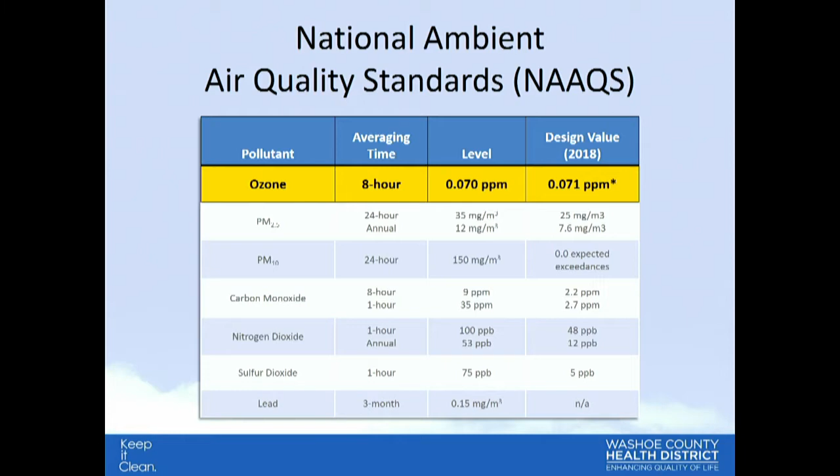So again, how did we get to where we are now? EPA strengthened the ozone standard in 1997, 2008, and 2015. We saw the economic recovery and growth since 2011, and that ties in with employment, population, VMT, and a result of that is higher ozone concentration.

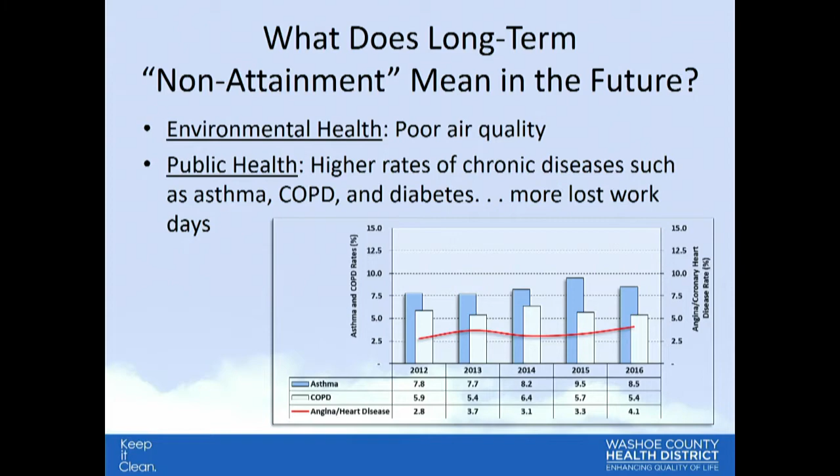So what does long-term non-attainment mean in the future? On the environmental health side, it means we have poor air quality. On the public health side, if that's what you're interested in, we're going to see higher rates of chronic diseases, asthma, COPD, diabetes, and also more lost work days.

On the economic health side, once we become designated as non-attainment, that really starts the clock for EPA as far as what we have to do. If we're designated non-attainment, there are increasingly more stringent requirements that EPA will apply to our area until we meet the air quality standard.

Making sure everybody's paying attention. For industry, it will require additional expensive air pollution control equipment. And if you look back at our inventory, the sources under our jurisdiction are about 5%, so it would put a very big burden on industry if we needed to get the reductions from that area.

The regional transportation plan will need a revision, which will include transportation conformity and a motor vehicle budget. Those are binding, and the regional transportation plan must conform to air quality plans, or FHWA will not approve the RTP. Emission offsets are a possibility, up to 1.5 to 1. So backing up a little bit, this doesn't put a halt on growth, it just makes it tougher for new and expanding businesses to come to our area.

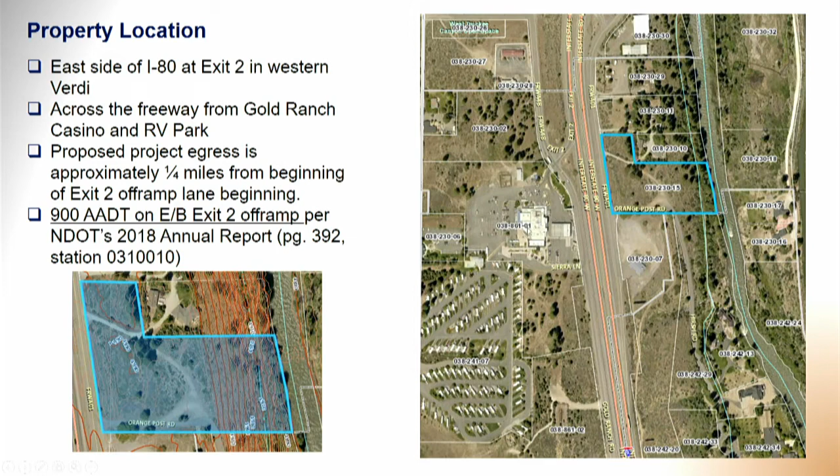Locationally, off of the off-ramp where the freeway lane splits, our access point and egress point is approximately a quarter mile from where that off-ramp lane starts. We are directly across the freeway from Gold Ranch and the RV park associated with Gold Ranch.

The property is in the city of Reno, brought in during the early to mid-2000s. It has City of Reno zoning as community commercial, and is master planned for suburban mixed use. Those two, the master plan and the zoning, are conformant with one another.

The special use permit request before you tonight is for a mini warehouse project in the CC zone, which is allowed with a special use permit, so that's primarily what we're seeking. We also have a request for an extension of hours, and we're happy to have dialogue if you have questions. This would allow people to go in and out of the facility, so if they're coming back late they could drop off their boat or RV after hours. Or we could have lockout times if you'd feel more comfortable with that.

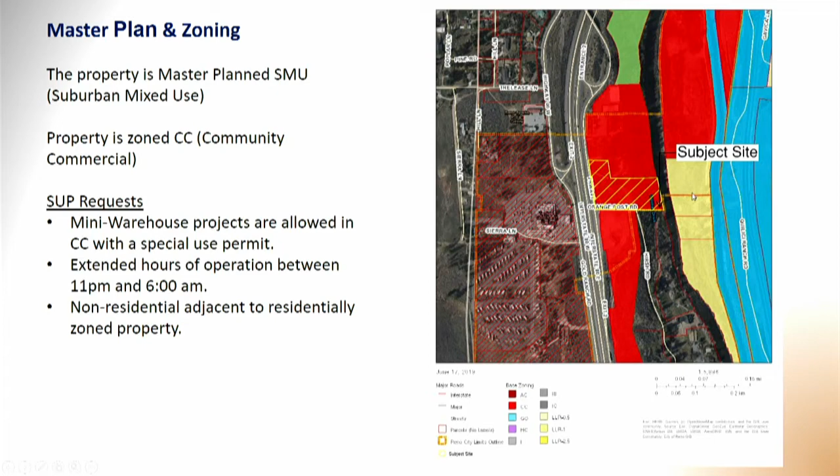We also have non-residential use adjacent to residentially zoned property. This property here is community commercial zoned, and this portion is county land—part low-density suburban, which is residential, and part general commercial. I'll show a county zoning map. So there's some commercial and some residential nearby. Across the river there's large lot residential, one dwelling unit per acre. That is really our nearest residential land, along with this parcel here—those are the two I'll be referring to when we discuss residential adjacency.

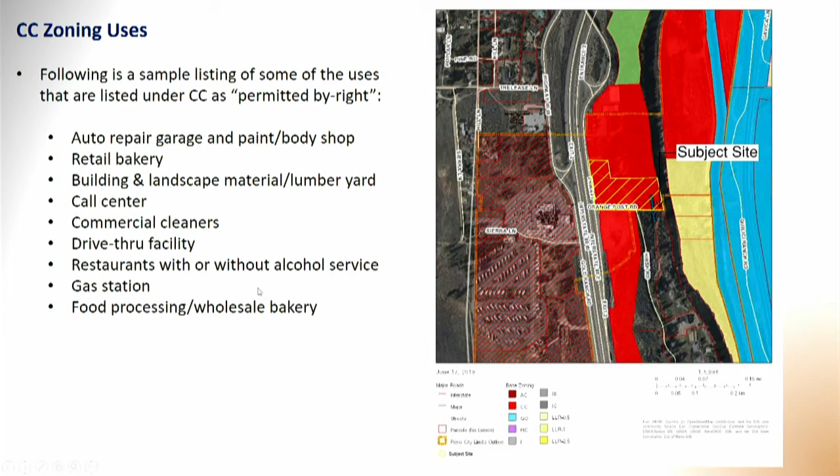The CC zone allows many different uses. One, with a special use permit, is mini warehouse, which includes boat and RV storage. I wanted to highlight some uses allowed by right under the use table. Given this location, there'd be residential adjacency issues with by-right CC uses such as auto repair and garages, retail bakery, commercial landscape material, lumberyard, call center, commercial cleaners, drive-through facilities, restaurants with or without alcohol service, gas stations, food processing, and wholesale bakery. I didn't list all of them, just a sample. All of these would present a higher impact relative to traffic and other site impacts. One thing I'll point out clearly tonight is that this is a very low impact development we're proposing.

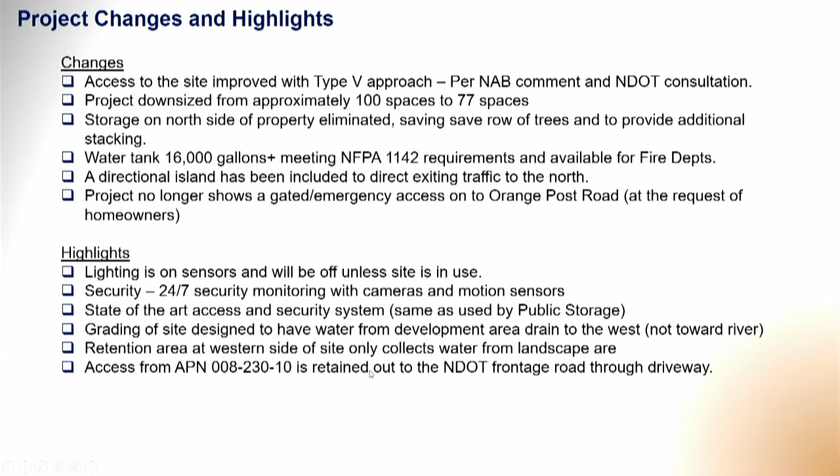Now let's get down to our site plan and show you where that is. There is an access that comes out, a driveway that comes out. We're retaining the right for access across that for the property owner to the east of us, which is right in here. I'll show you this site plan.

This is our old site plan, the one we originally submitted, which had 48 or 49,000 square feet of storage area. We did have development up here on the north. This access in here didn't have enough stacking, and there were concerns from NDOT, the city, and also from the neighbors. We also had an access down here that came out to Orange Post Road, which is a private access road, and a retention basin up here.

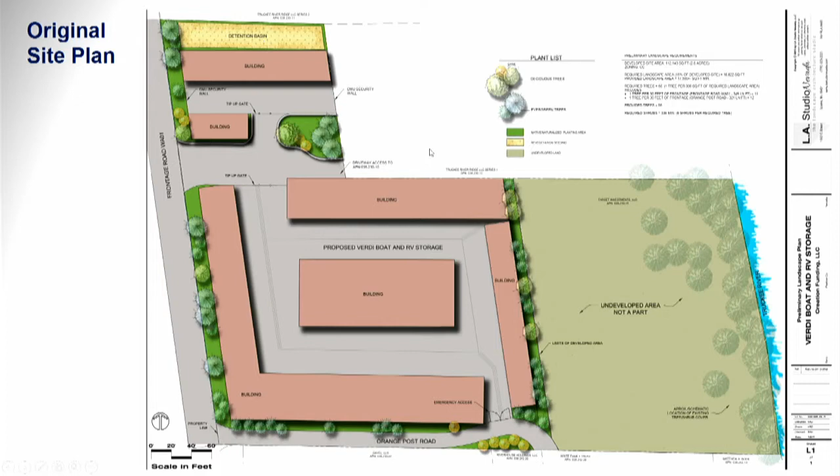Now let's go to our modified site plan. We have no development on the north area. What we have instead is the parking lot and stacking area, and more parking spaces because we've decreased the overall impervious surface area. We have a smaller retention area, located here, and there was some concern that it would flow down to the river.

Everything from this point on will grade back towards the west. The only thing this retention area will pick up is any water that might come out of this landscape area in a bigger storm, and it would collect here and then go into the ground. We have a valley gutter system with catch basins that will treat water for petrochemicals, including an oil water separator, as detailed in the City of Reno Orange Book standards. I have a copy of that if you'd like to look at it.

I can put that on the overhead. Mentioned 14 average daily trips, equivalent of about 1.5 houses.

We'll have no wash bays, dump stations, waste retail sales, repair or service on the site. This will basically be an access where you can park your vehicle, your boat or RV, and move on your way.

Trees that'll be retained on the site. This is a grove here of evergreens that before we had coming out. Tree here, we actually picked up a setback area with the redesign, and tree here, and then the trees down along Orange Post Road weren't anticipated to be saved. There was going to be some relocation of that road before, and now we're going to leave that road as it is.

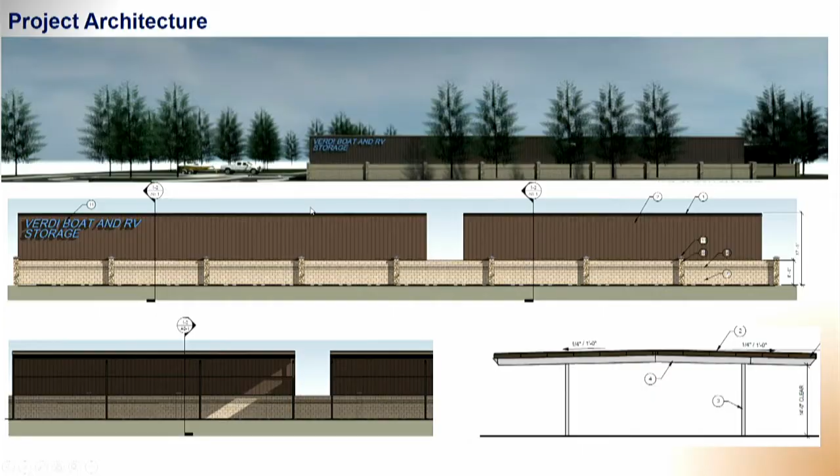I won't go through this, I'll just finish up. We feel that we have a very low impact site because of the way it's been designed, the number of units, the low traffic. We're in agreement with the staff and the recommendation. We do believe that all of the findings can be made.

I have each one of the findings. If you have any that you're having a question on, I'd be happy to go through those. With that, I'll close my presentation, be available for any questions. Okay, thank you, Dave. We'll call you up with questions after we hear from staff.

Brooke, good evening. Good evening, Planning Commission. Brooke Oswald, Associate Planner for the record. Michelle, can I have the overhead up very quickly?

So in submittal of the staff report, there was an omittance of a condition, that's condition 11. It is referenced within the staff report itself. That condition deals with signage. Specifically,

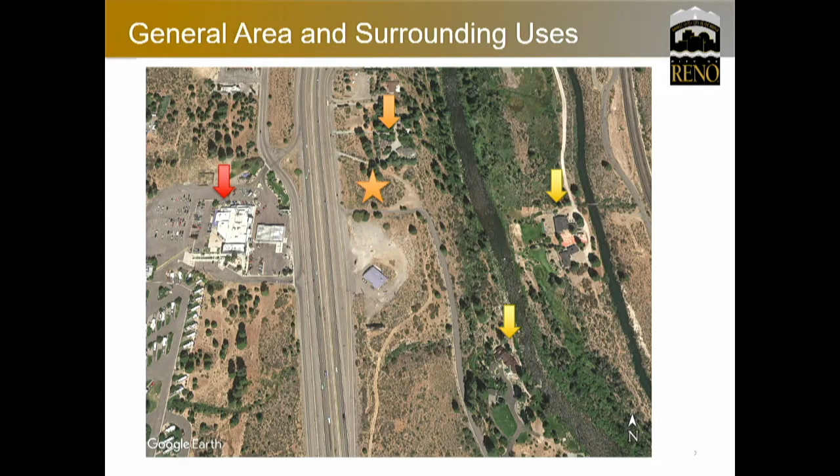For the special use permit, mini warehouse community commercial zoning, we're looking at the appropriateness of that use with surrounding uses. It is allowed within that zone with the SUP for extended hours of operation. We're looking at impacts associated with that project, and it has relatively low impacts. With extended hours and 14 vehicle trips per day, we would not anticipate large levels of noise or glare. Additionally, the site is walled, and the ambient noise of I-80 would overcome any noise anticipated from those extended hours.

The commercial development adjacent to residentially zoned property is significantly geographically distanced from the project itself. Looking at RV and boat storage in the proposed project, this has lower overall impacts than other allowed uses, as was demonstrated. There are similar uses in close proximity, and this is a normal use we would anticipate off our highway exits and other car-oriented areas.

The allowed height in our community commercial zoning is 65 feet. They are proposing 18 feet, that's a 6-foot wall plus approximately 12 feet above that, so much lower than the allowed height. The average trips per day is 14.

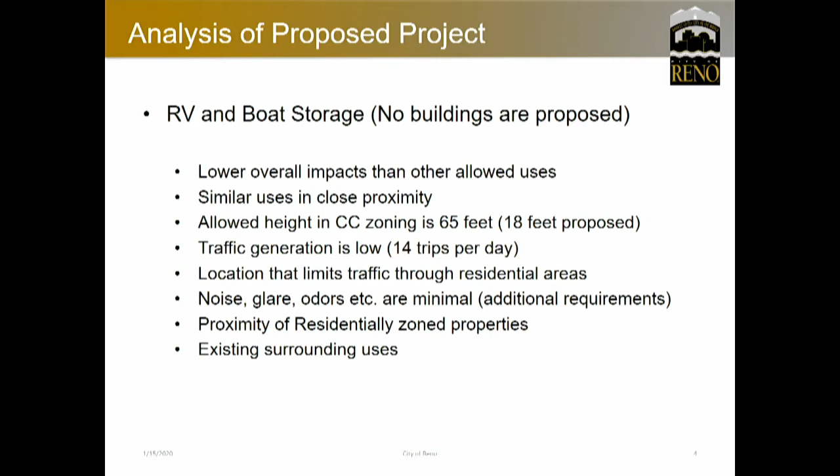That proximity to residentially zoned properties is far enough away that we're not anticipating any impact from glare or noise. The main impact is that residential unit lying directly behind the project, but we have a 6-foot CMU wall in the area that will limit any light glare. There are also maintained existing trees and an existing solid fence that will limit light glare into that property. Access to any adjacent properties has been maintained, both to the property directly east and adjacent to the site, and down Hirsch Road or Orange Post Road.

As was mentioned, limited utilities in close proximity to the project really modified this project and proposal drastically. As we move through fire, not having water service and not having sewer, this does become an appropriate use for the utilities that are provided there. With the modification of removing the buildings, the fire code can come back under 1142 and be used. Trey Palmer is here to answer more questions on that.

The access to NDOT is on that roadway exit 2. All permits, design criteria, everything will be handled with NDOT on there. They have looked at the project, made suggestions, and the applicant has worked with them to verify they're meeting their standards. They will have to get their permits through NDOT before they'll be permitted to move forward.

Those low traffic volumes coming off of there, I spoke with NDOT. We're seeing about 800 vehicle trips a day coming off that exit. They said it was relatively low, and they had very little concern about the traffic that this was going to generate. The applicant has moved forward, and will make any signage or corrections needed to accommodate their project.

Those easements associated with the project, as I mentioned, the easement is maintained down Orange Post Road. The access has been maintained to the property that is adjacent to that property. It should be noted that the owner who owns the property to the north of that project site - there is also access to that property behind through that neighboring property.

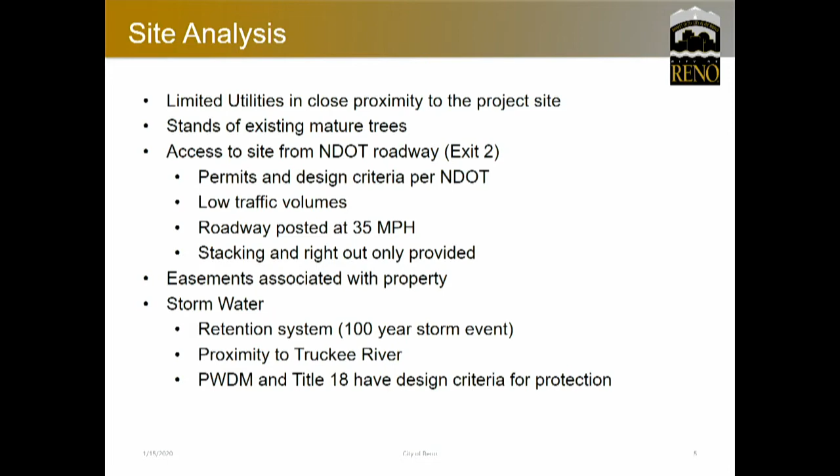The project has been redesigned, and with that redesign, it does meet the 1142 standards. They are a rural development standard. There will be a water tank and pump provided on site. That water tank and pump will be used to fight fires there, but will also be able to be used by Reno Fire Department in case of other emergencies in the area.

The proposed site meets all the access and circulation required by the Reno Fire Department. The storage area is contained with a non-combustible material, which means fire is, in theory, contained with a non-combustible CMU wall, and so fighting that and its spread becomes limited in that way. The emergency access has been provided to that secured area through one of the conditions.

There will be no management on this site - it will be 100% remotely controlled. Access will be through either cell phones or other mechanisms, and the site will have cameras that will be monitored 24 hours a day. Fire and police have reviewed that and feel comfortable with that security system and that ability to access or monitor the site.

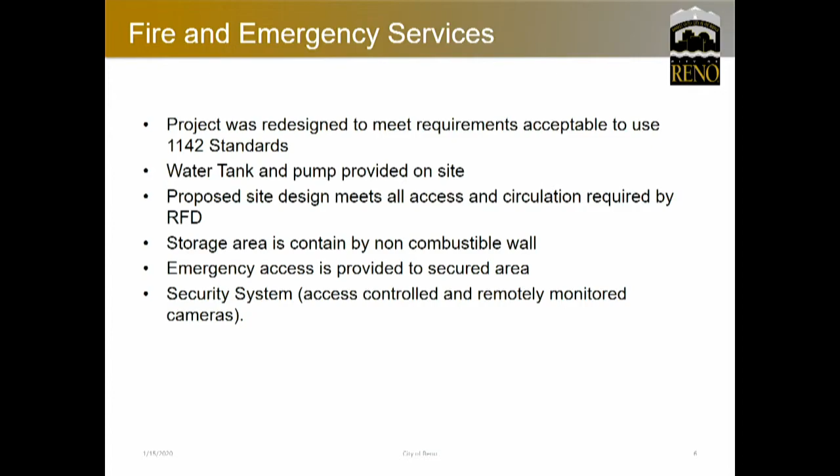So with that, with the application and the materials presented by the applicant, and the conditions as applied through the staff report, staff can make all applicable findings and recommends approval of the project. Myself, Mike Michelle, Planning Manager, Trey Palmer are all here for questions as needed.

Thank you. Thank you, Brooke.

Before we get to questions, I'm going to open it up for public comment. And before I do that, I'm going to ask for disclosures from the commission. I'm going to start with Commissioner Olivas. Commissioner Olivas, I visited the site and received email.

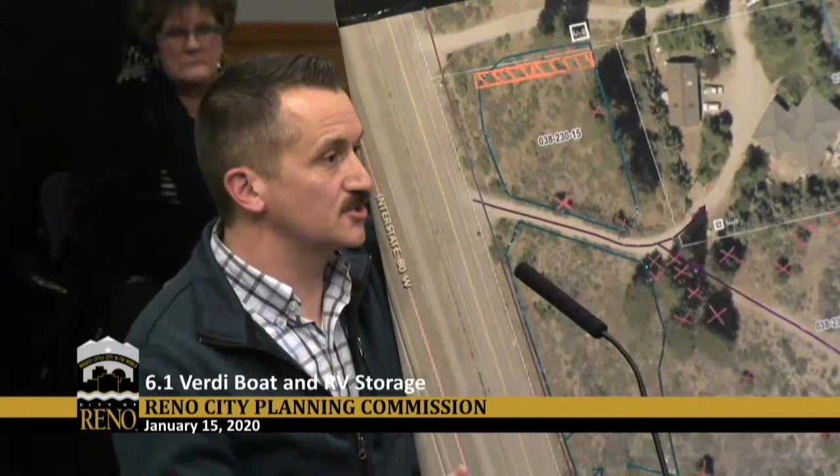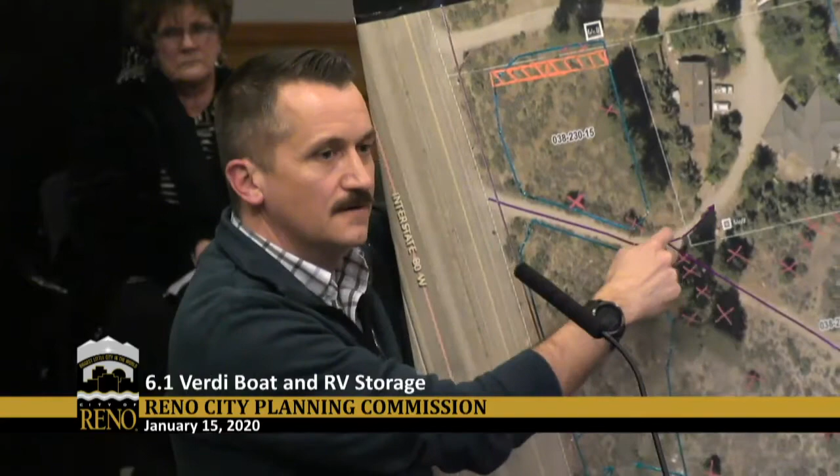Now imagine Memorial Day, Labor Day, July 4th. Any weekend during our Washoe County School District shortened summer, people are going to be out there getting their boats and everything. Imagine Memorial Day when everybody's trying to get their RVs and boats, and you live in this house, and you have to turn into the RV thing, then turn here, and then turn here.

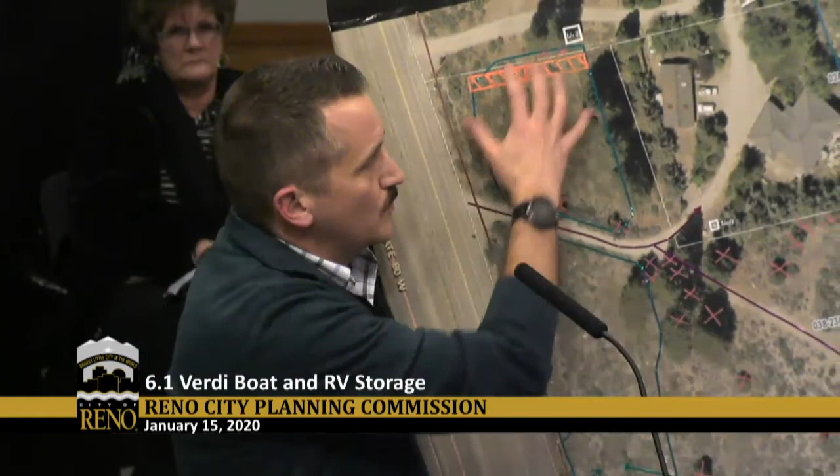What are you going to do on that Friday night when everybody's trying to get out of town? Yes, we have another road that they can access, but like my wife said, we may not always own that property. That may not always be the case, and the developer can't assume how we're going to use our own property. So that 14 average daily trips is going to be less than that in the winter months, I would be safe to say.

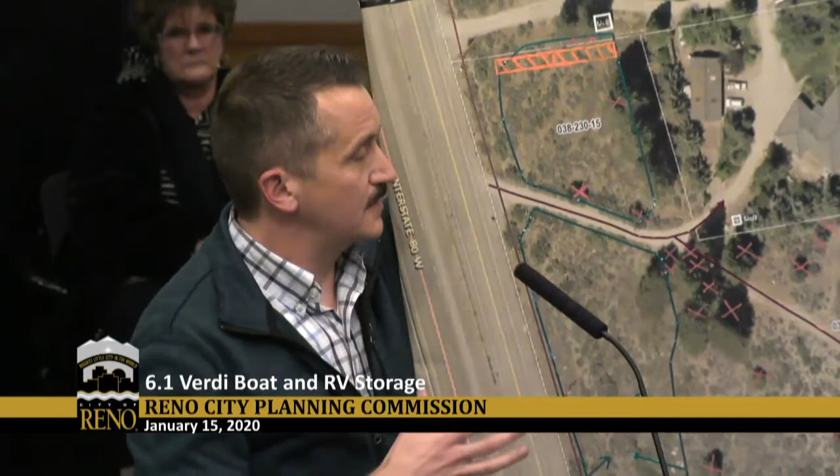But in the summer months, especially in those peak weekends, it's going to go through the roof. And that's going to just compound all those safety concerns that everybody's brought out. For those that have visited the site, if you see traffic coming off there, you know people speed. Everybody speeds. We know it's marked 35, but nobody cares.

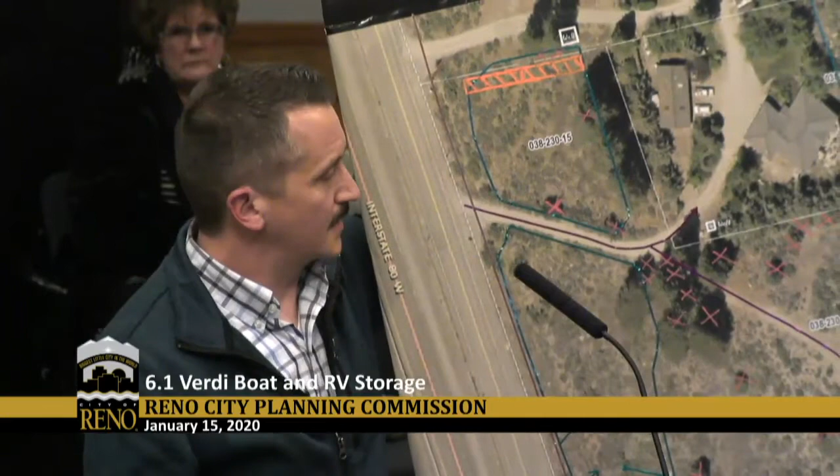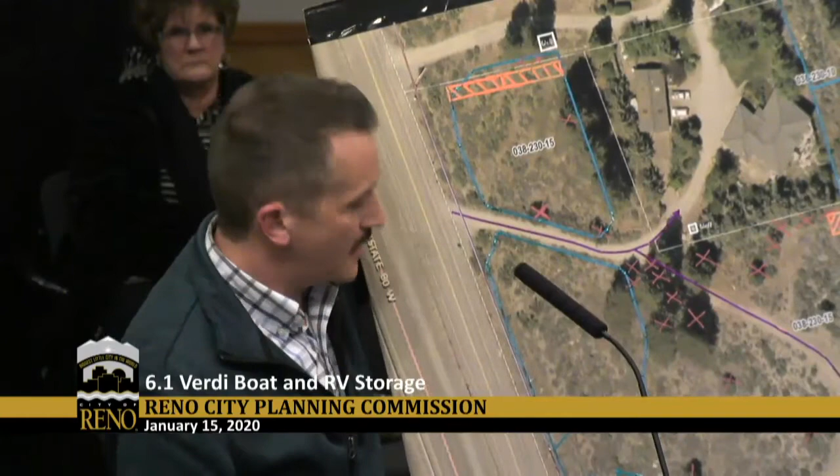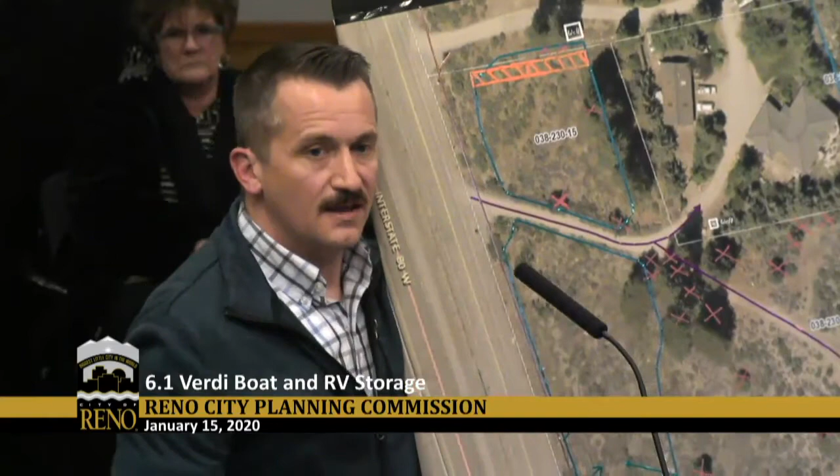If you can imagine somebody having to make a left-hand turn into this property, towing an RV or a boat, and they don't judge the speed that somebody's coming off that highway properly, it's going to be catastrophic. Same when they're exiting—you've got a big trailer and they're trying to come out. If they don't gauge the speed of that traffic coming off of 80, there's going to be a catastrophic accident there.

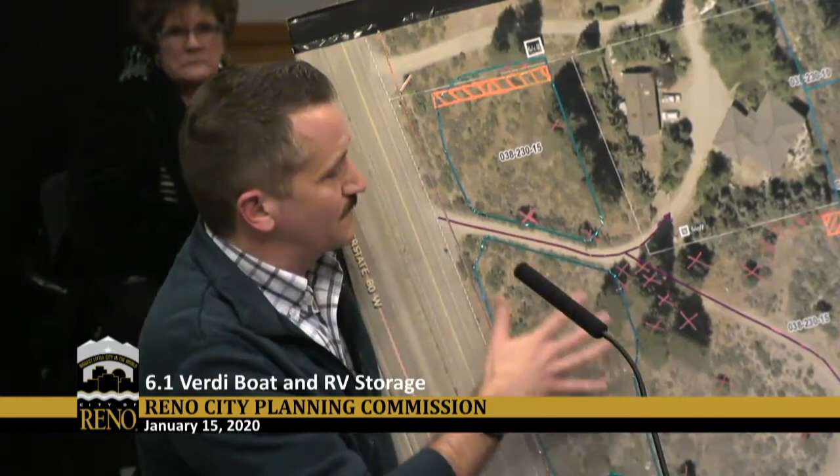And the project doesn't fit. I understand this is community commercial. I understand with the special use permits it is allowed, but right here, this is basically where the gate access is going to be to that property.

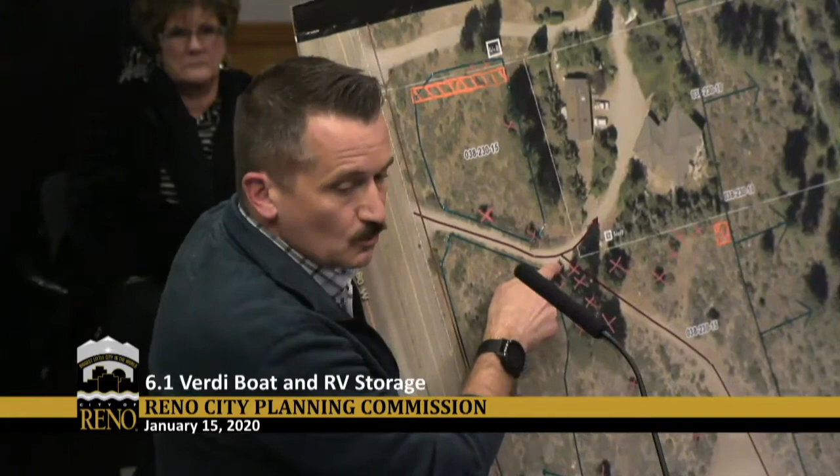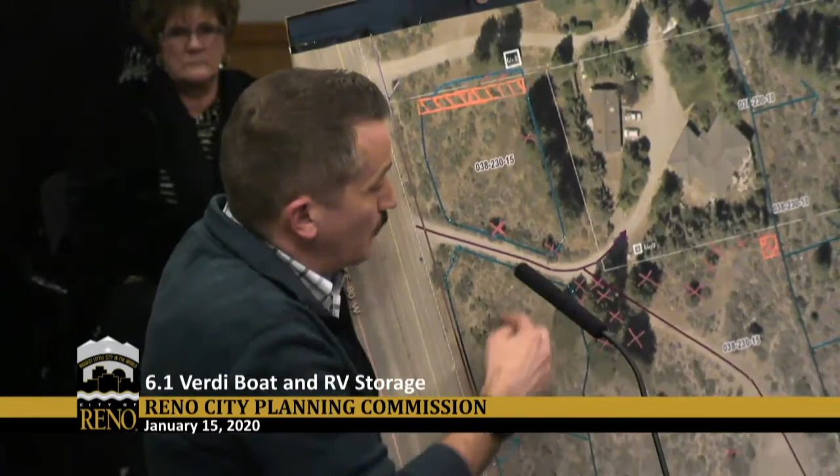There's no bathrooms. What are people going to do if they have to go to the bathroom? That good crop of trees that he said he's going to save, it's down in a little depression. Guess what? People are going to go down there to use the bathroom because there's no bathroom facilities on site here. So there's a lot of concerns that we have with this. It's not appropriate for this spot. Thank you for your time.

Apparently, we need to increase the size of our monitor to be able to do that.

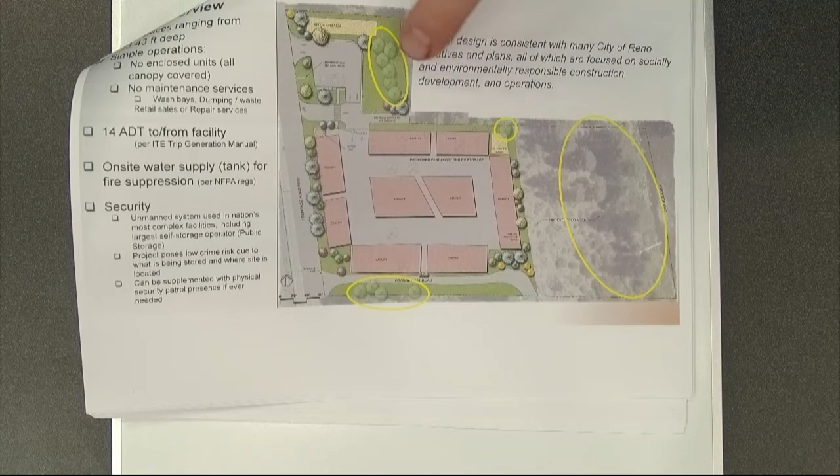Their well is right here. If that needs to be farther away... I had something on my phone I was looking at, but it was distance requirements from septic and leach fields to wells and property lines, not from a well to something that basically infiltrates water, which is what we're going toward. If there's a requirement for that, we've got additional area we can work with to pull that away and reconfigure it. We definitely want to keep the trees there.

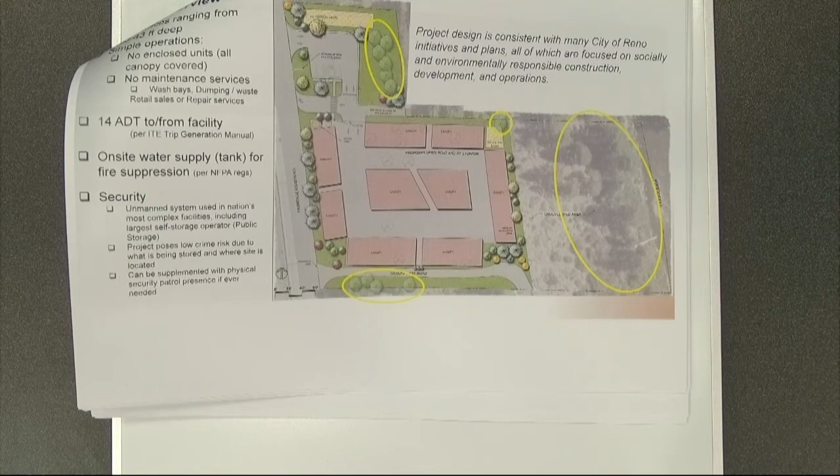I think Brooke alluded to it - part of it is that when you go into final design, everything doesn't remain exactly like this, but we have to be in substantial conformance. If there's a concern from the Washoe County Health Department about a retention basin being too close to a well, and I don't believe there is, we can find another place - it's already in the low part of this site where everyone's pointed out the trough is, that we can work with.

Last week we looked at a project and I asked about percolation. If you've got this designed to where it's going to go out, how are you so sure it's going to perk there? A lot of areas of town don't perk very well - we've got some bad soils. Being up in the Sierra range, you're going to have a lot of decomposed granite and different types of soil that help water perk in faster.

If we find a horrible percolation rate, you can still grant approval to the project, and if there's a condition of approval we can't end up meeting, the project doesn't go forward - it doesn't get built, or there has to be some engineered solution, or it might need to come back. You try to go through these things with a reasonable level of information without breaking the bank. You don't want to spend $250,000 for a solid maybe - that's not in anyone's interest on the development end. We look at housing costs going up and up, and the more you have to put in early with just a strong maybe, it's a challenge. So we try to do these things with the best available information.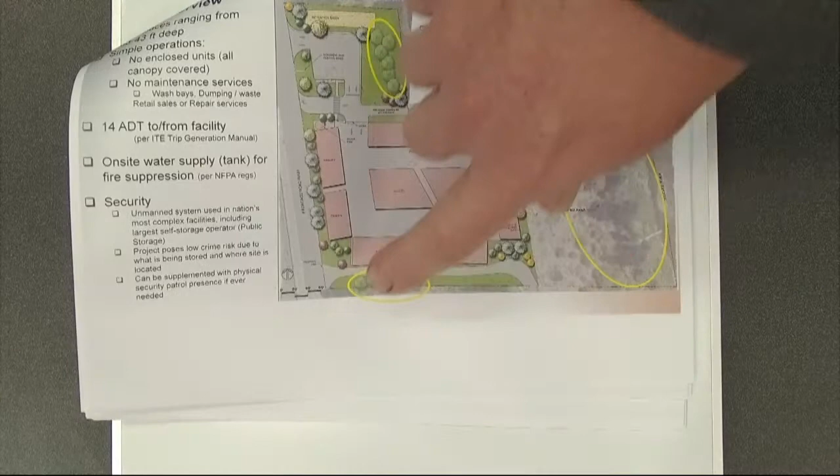We're probably going to be saving about 25 in this area. Got another one here - we got 4 along Orange Post Road, and we've got 6 up here. So there's 10, 11, and then 30 to 40 plus or minus trees. At 20 to 25 down here, we didn't go down the Mountain Goat Hill.

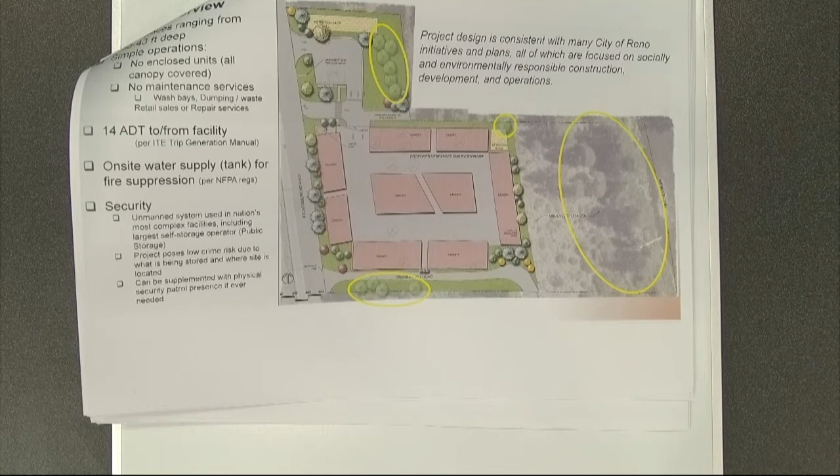But I know along those edges, there's probably more than one tree. We did it by an aerial view, and we tried to go very conservatively. So I think 20 to 25 is probably low.

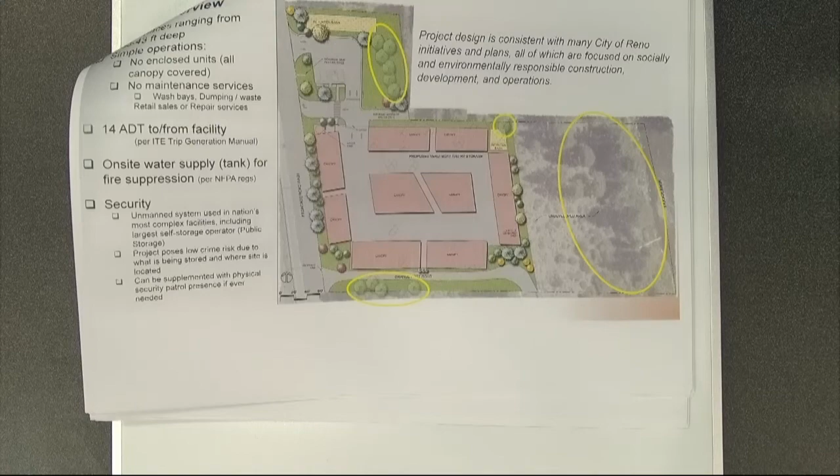And you coming in with the replacement trees up there with a large caliper tree? Yeah, we can come in with bigger caliper trees in a lot of these areas. We're trying to plant more naturally up along the frontage, and then in these corners, because as mentioned, this is a canopy system, so this side and this side and this side, they wouldn't be screened. What we'll be using is all evergreens to help screen that. If it helps in beautification to put some flowering trees out there, we certainly can do that.

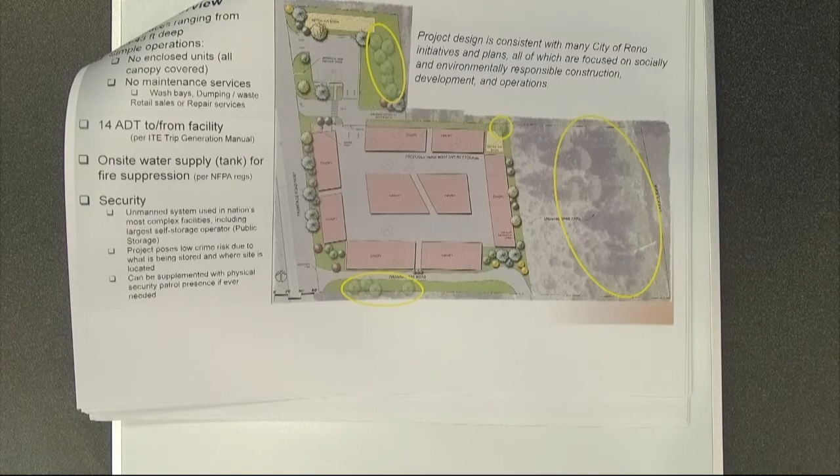We're working with LA Studio Nevada on the project, and I pointed out we wanted trees along the back to help the view from across the river. The home that's 525 plus or minus feet away - we didn't want them to just look at the back of a 6-foot wall and the curtain wall coming down. We wanted to give some break up to that. So around the perimeter of the property, yes, we can plant larger trees. I wouldn't see us planting a 25-foot evergreen at the start, but in the code, there are requirements for larger trees, and I think some of those code requirements keep going up. And Angela's smiling at me that, yes, they are.

One final question. Did you have a NAB meeting last night? We did. We don't have any paperwork in front of us as far as NAB comments.

Can you fill us in a little bit? Those were emailed to you. Yeah, there were a lot of comments back on lighting. There were comments and questions and concerns on the easement. Everything that you heard tonight was stated last night. We did have a NAB meeting previously in August of 2018, and that's what generated where we are with this.

And a lot of the positive change that we did make. I know that there was a list, and I'd love to get a copy of that list that was handed out because some of the things, as they were read off, all of those haven't been exposed to us. Maybe they have it in some way, shape, or form, but I haven't seen them concisely. We're happy to work with the neighbors on this. We're happy to find positive solutions for the neighbors up here and also the neighbors on Orange Post Road.

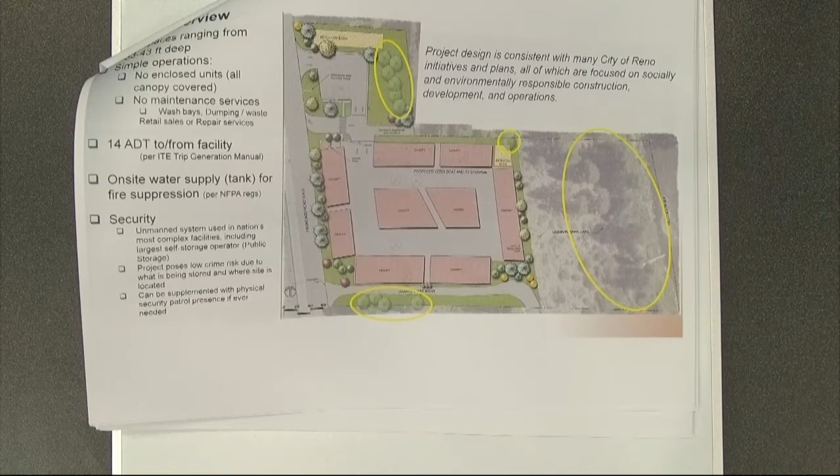So if they're open to us having an access out - in the previous site plan, the access we had there was just a gated emergency access that hopefully would have never had to be used. But they told us, no, that's for our use only, you can't access there. And maybe we misunderstood, and if that was the case, I apologize.

Thank you. Commissioner Gower, do you have a question? Mr. Chairman, I was just going to ask for a point of order and ask the applicant's representative not to engage with the public and vice versa. It's really disruptive. Thank you. Apologize.

Dave, couple of questions. I noticed in looking at the plans and everything that there does appear to be a pretty substantial low point at the current western edge of the property. Actually, even further up, that appears to be - looks like drainage off of the off-ramp. Looks like it's a pretty significantly lower elevation even than what you're showing in your cross-sections. Your cross-sections demonstrate how much lower it is than what your proposed elevation is.

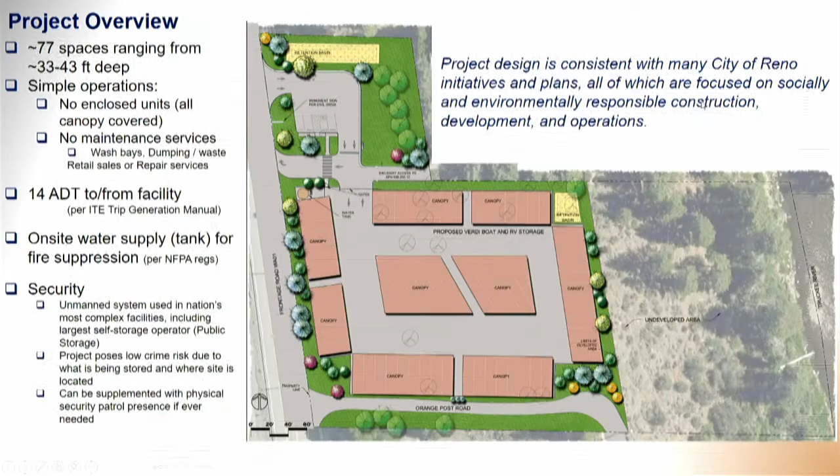See if they've got a plan for that. And it appears that whatever is working its way into that from a drainage standpoint, you're proposing to channelize between the front of the building - I guess I'll use the west side of the building - onto, and continue it on to the north. So I guess my question is, are you adequately addressing what's coming off of the freeway there?

I know not all of that is necessarily drainage, some of it could just be natural, but it seems to be a pretty significant delta with respect to the grading that you're doing and the potential for water to be coming into that area.

Yeah, I talked to our engineers this morning about that and looked at some of the area that's coming across. We heard last night some more information, a rough estimation of water going through that. I can only imagine what amount's going through there, but we would need to probably pipe that rather than rechannelize that. That is water that's coming from a different area.

It's not water that this site is creating. And I understand, so we'd pass it through. My question is, how are you addressing the fact that there's water coming onto the site that's not yours, that would then need to either be sent off the site in the same location that it is?

Right now, the water comes out and comes down this way up into this area. And there was comment last night at the NAB meeting about this area getting full enough that enough water would stand there that it would breach and kind of flood out this area to the north.

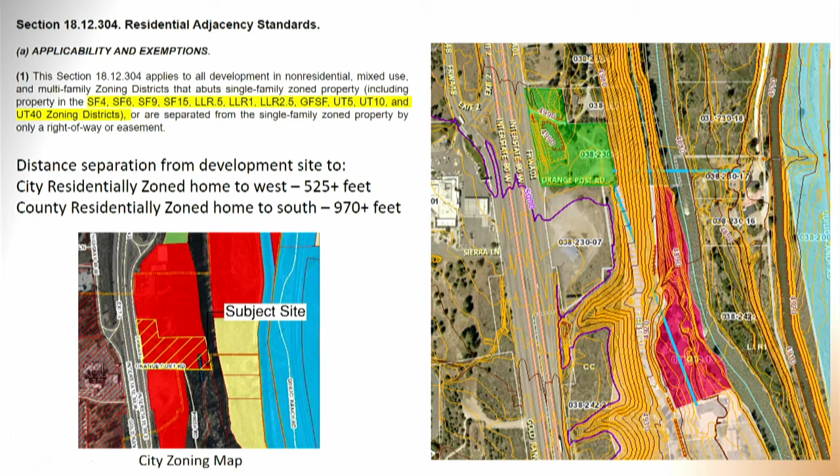So the question that I'm going with this, if you're piping it, is any of that water anticipated to be going into the retention basin? So you're separating that.

And so then the next question I had, and I heard, and it didn't make sense at the time, and I think it's been clarified, but I thought I heard the discussion in your presentation that the water that was going into the detention basin was what was coming from your landscape area?

Yeah, I'll point out where that is. I want to clarify, that was something that came up at the hearing last night, that there was a thought that this would be going down. I'm not asking where it's going, I'm asking where the water that's going into that basin is only coming from.

Collected from back here. All of these canopies will tilt in, they will all come to the center. It would be any additional runoff that comes back here that would typically need to get piped out in the system. We're trying to retain it back here so we don't have to run a pipe out that would have to continue all the way out to this retention basin.

Everything else, all of the canopies, all of the hardscape, is being collected, per the conversation we had with Mr. Michelle, into sand oil separators and piped into that retention basin.

Yeah, we'd anticipate that there'd be a catch basin either in here or we could get it over in here with the driveway and then pipe it back. And that would be caught. You'd have the sand oil separator, and then, as Mr. Michelle said, within your retention basin, you've got grasses and things that do some additional cleanup to that water going into the ground.

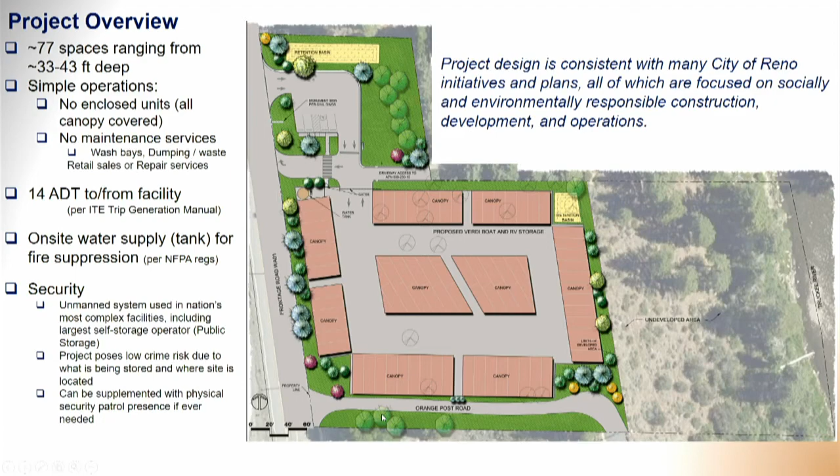Coming down to the south, you'd have impact on at least 1, if not more of them. Okay, and then while this is up, just to get a visual on this type 5 work that we're doing, the widening.

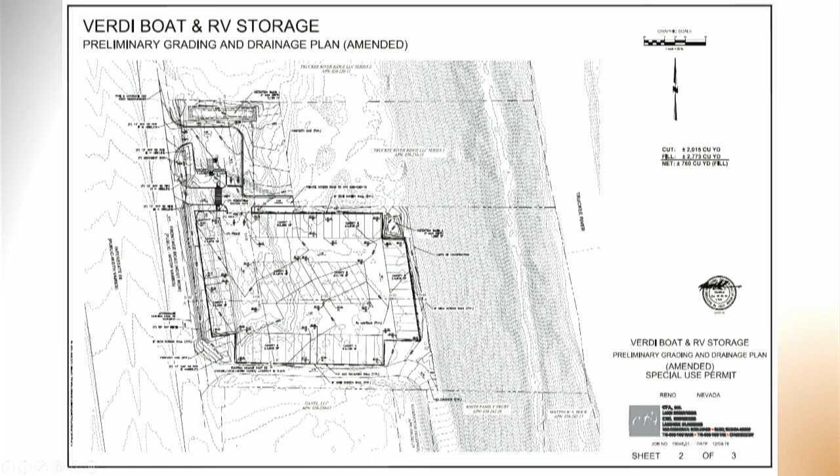Can you let me see a plan? I think I may have accidentally pulled out my site plan. This one shows it a little better. It's the grading plan. I guess what I'm trying to figure out, the grading plan is probably the worst plan because there's about 18 lines there that have nothing to do with the edge of road.

No, that's Orange Post Road. So the question that I have, and I can't tell from any of the images, and the landscape plan doesn't appear to show it, what is the extent of this type 5 widening that's being proposed along the west side of the parcel? Does it extend all the way to Orange Post Road, or is it limited just to the 2 drive entrances that are proposed into the site?

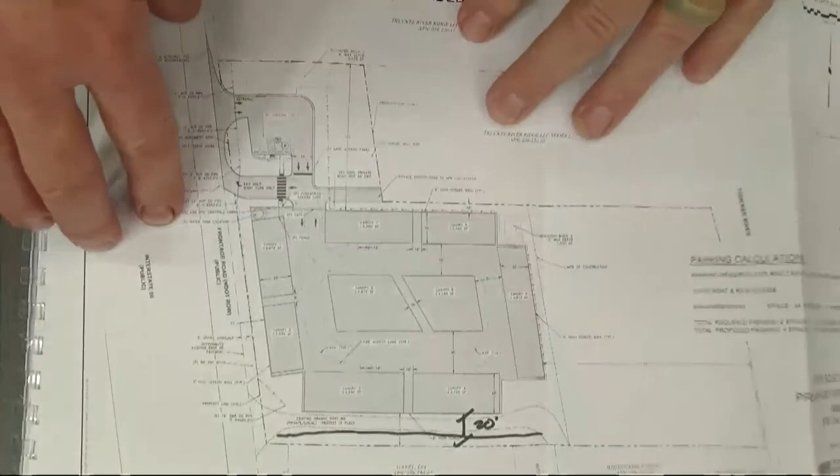Here, I think this, can you go back to the overhead? Oh, thank you, this is the right way, okay. So this is the site plan here, you can see. Can you pull the microphone towards you, if you would, please, Dave? Sorry about that, normally you don't need a mic, but it happened to need to pick it up this time. Okay.

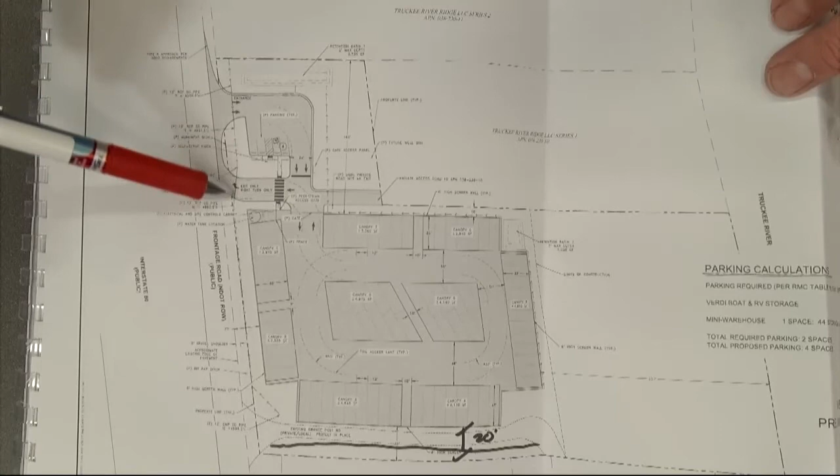The right-of-way edge is located right here, so you can see that this island area is farther back from the right-of-way edge, and you can see here a taper coming out. That taper would occur down here. We don't have the line work right here on the, what I'll call the pork chop island, the directional out. That would end up being pulled back, and there'd be a taper as you come down here.

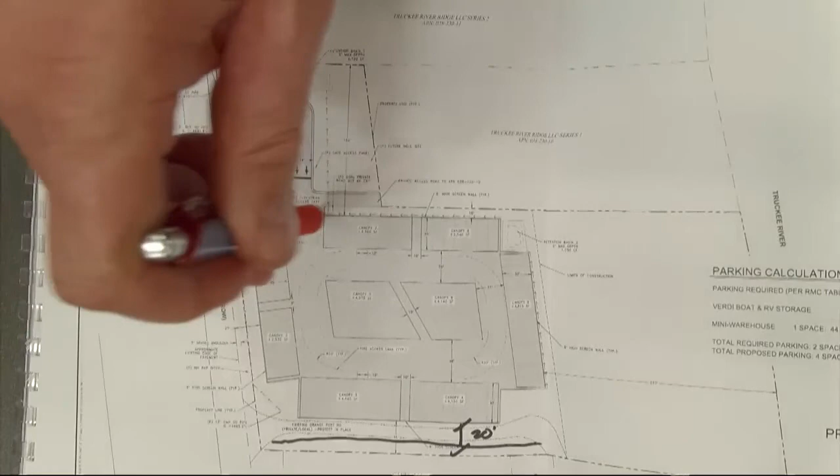You'd have more pavement to pull out on, start to make your transition to come into the site, which is where we have the stacking. Then you go in through the gate, which would be here. Okay, so yeah, it does pull back things out.

Let me back up now, because you touched on my next question. Circulation, it's an entrance only and exit only based on the circulation that you're showing there. Correct. Double lane coming in, stop, is that a stop bar?

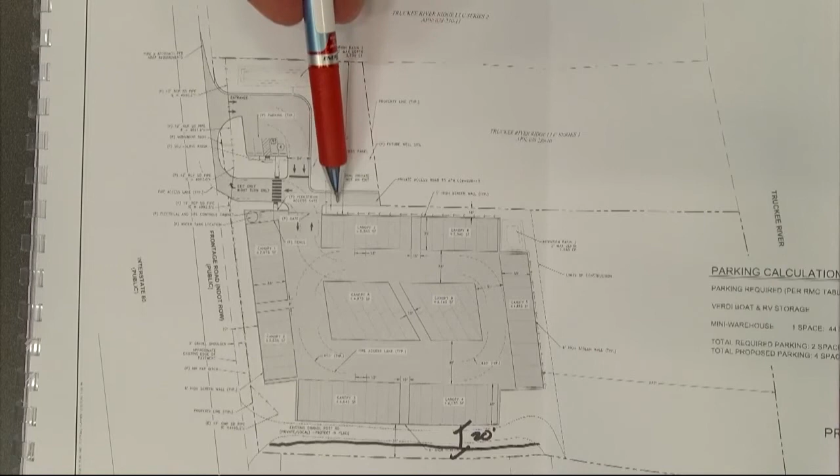That would be where your kiosk is and you punch your key code in. So that leaves this exit open, and that's the driveway location here, which I believe is 12 feet, and that accesses the property to the east.

So to answer the question, where that stop bar is at the key card access, there's no stacking in front of that. The gate's on the other side. But you would have to stop on the opposite side of the driveway in order to access that. That's where you'd either punch your key card or use the app on your phone to open the gate and go across.

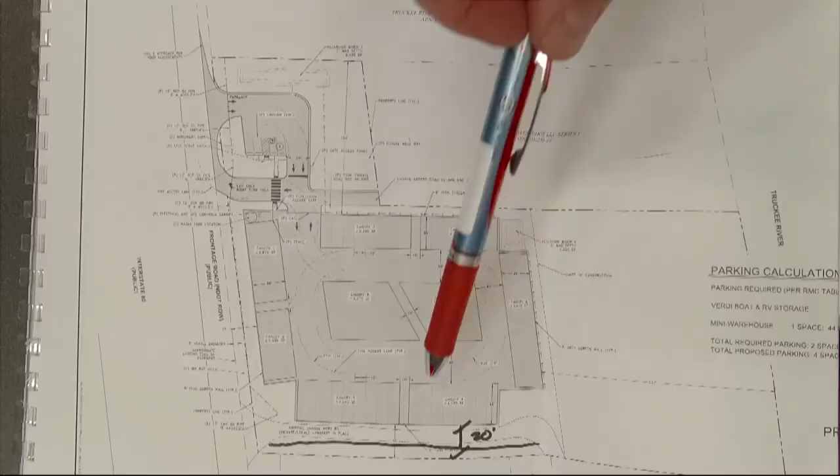Understood, I'm trying to clarify, again, internal vehicular circulation with respect to what you're proposing there. Okay, on internal fire access circulation, here we have the radius turn set. I see that, that's not a concern. So then the last question, and I finally thought of one for the fire chief, but I'm going to let him sit over there and ask you.

The requirement for the open sides on the canopy, is that part of this idea that you can enclose one side of the building and still have it met, but the moment you enclose two, you don't have three sides open? Correct, and that was from my conversations with Trey when we were working through some of the issues on the initial design. Brooke, are you in agreement with that, three sides open in order to meet the fire requirements we're looking at here? Correct. Brooke Oswald, Associate Planner for the record, in working with Trey Palmer and the Reno City Fire Department, my understanding was that with three sides open, it no longer becomes a building, it becomes a structure, and how that is considered from a fire perspective changes at that point.

Okay, thank you. And one last comment, just because I think there was some confusion: the comments from the NAB meeting last night were forwarded to us electronically earlier this afternoon, so most of us acknowledged in our disclosures that we read those. That came up during public comment, so I just wanted to get on the record that those were forwarded to us in their entirety prior to this meeting. Correct, I requested those by 9:30 or 10 this morning to make sure I had collected them. They did kind of peter in throughout the day, and as they did, I passed those along.